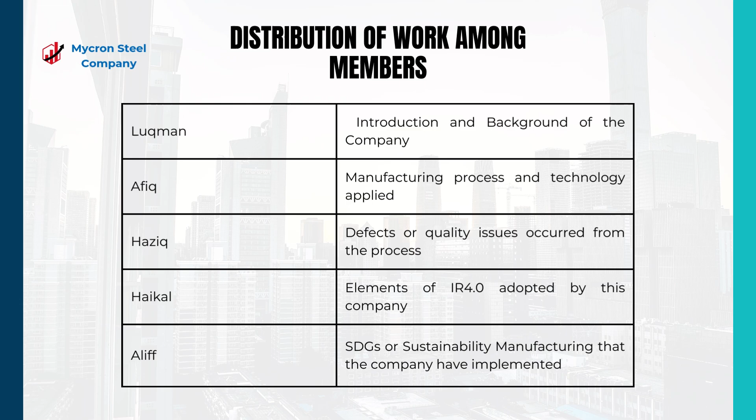Steel is an essential material used in many industries, including construction, automotive, and manufacturing. Companies like Mycron Steel play a crucial role in ensuring a steady supply of high-quality steel products to meet industrial demands. In this presentation, I will cover the company's history, its key subsidiaries, and its contribution to various industries.

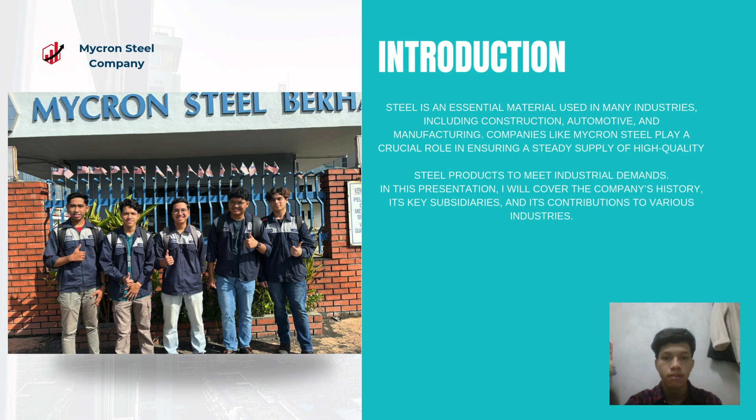Mycron Steel Berhad, often abbreviated as MSB, is a leading midstream steel processing company based in Malaysia. It was incorporated on 24 July 2003 and later listed on the main market of Bursa Malaysia under the stock code Mycron 5087. The company operates as an investment holding entity, providing corporate management services to its wholly owned subsidiaries involved in manufacturing, processing, and trading of steel products.

Mycron Steel specializes in producing cold rolled coils (CRC) and steel tubes, which are used in various sectors such as: first, automotive, for car body panels, exhaust pipes, and structural reinforcement; second, electronics and appliances used in refrigerators, washing machines, and air conditioners; third, construction for structural framework, roofing, and wall panels; and lastly, engineering and manufacturing, where they supply pipes, scaffoldings, and mechanical components.

As a steel manufacturer, Mycron Steel sources raw materials such as hot rolled coils (HRC) and converts them into high-precision steel products that are essential for downstream industries. The company strives for innovation, high-quality production, and sustainability to meet both local and international market demands. It also focuses on technologies and advancements to improve steel processing efficiency and ensure compliance with global industry standards.

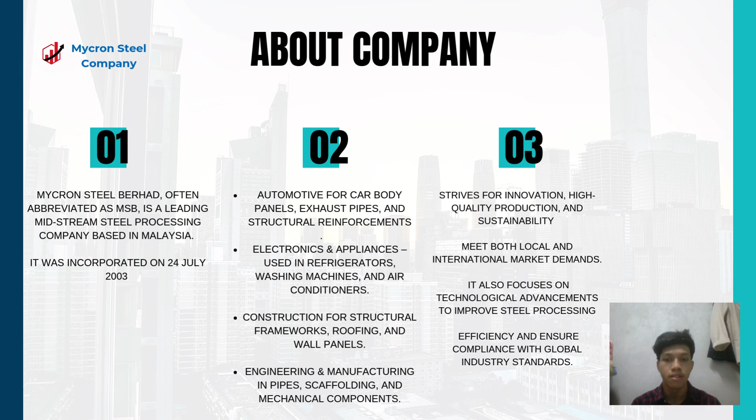Mycron Steel Berhad operates through three primary subsidiaries, each specializing in a different aspect of the steel industry. But today I will talk about Mycron Steel CRC Sendirian Berhad, or MSCRC.

The first subsidiary, Mycron Steel CRC Sendirian Berhad (MSCRC), was established on 6 January 1989 and started production in June 1990. It is notable for being the first manufacturer of cold rolled coils (CRC) in Malaysia and second, the only Bumiputera-owned steel company in the country.

MSCRC specializes in cold rolling technology, which involves reducing the thickness of hot rolled steel through a series of precision rolling processes to produce high strength and high quality steel sheets.

Key functions of MSCRC: first, the cold rolling process, where they convert hot rolled coils (HRC) into thin gauge cold rolled steel sheets with enhanced strength and surface finish. Second, the annealing and temper rolling, which improves ductility, hardness, and mechanical properties of the steel.

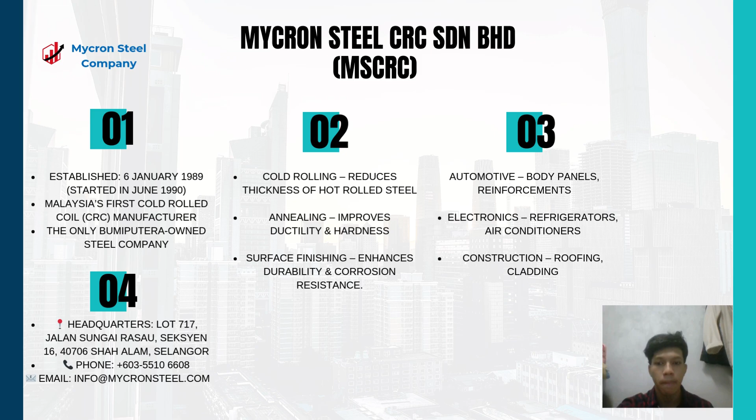Next, the processes used by Mycron Steel Company for processing the rolled steel: first, continuous pickling line; second, rolling and coating; third, cold roll mill; fourth, electrolytic cleaning line; and lastly, skin pass tension.

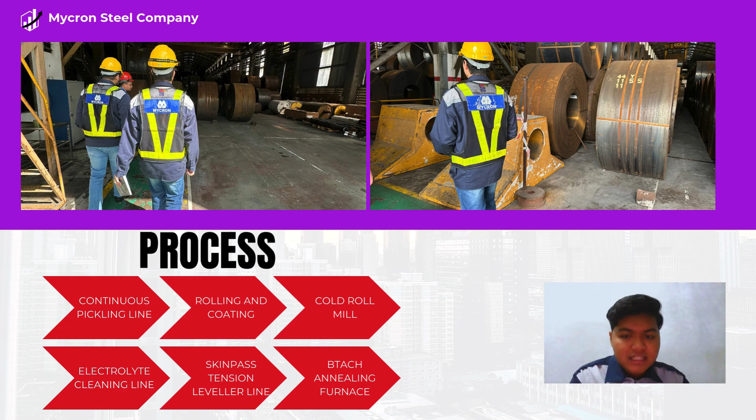The first process is the continuous pickling line. Steel coils or sheets which are imported are continuously fed into the line without stopping, reducing downtime. This helps to reduce delay with manual labor.

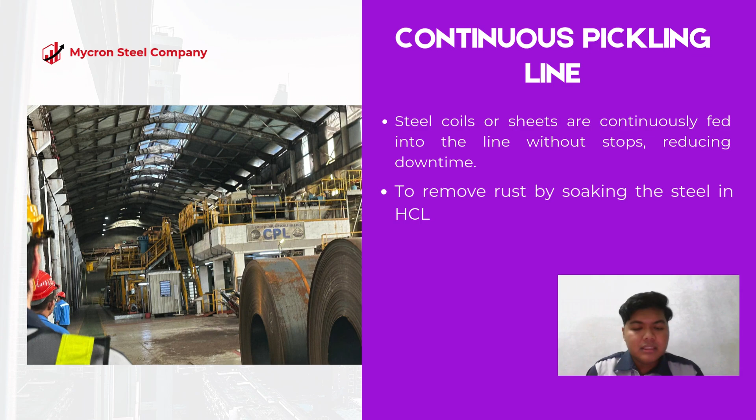Rolled steel usually comes with rust. There are ways to remove rust: one, by sandblasting, and another by soaking the steel in hydrochloric acid, which is what this company uses. There are a few tanks of acid - the first tank has the lowest acidity, and it will continuously increase. This process is a closed loop, which means the acid will be reused.

The second step, rolling and coating. Start with rinsing the steel to remove acid on the steel surface. Then the steel will be coated with a protective layer, usually oil, to prevent the steel from rusting.

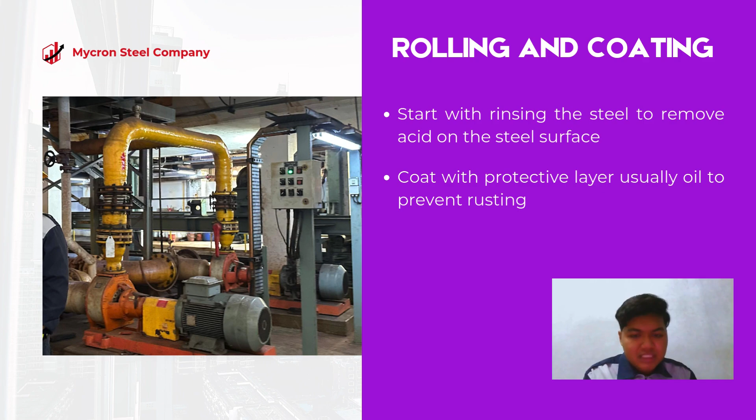The third process, the cold roll mill.

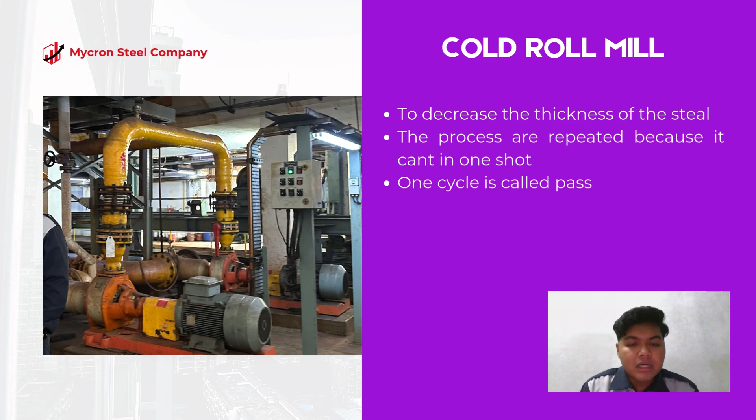The purpose of this process is to decrease the thickness of the steel to the desired dimension requested by the client. The process is repeated because it cannot be done in one shot. One repeated cycle is called a pass, and the pass always ends in an odd number. This process helps enhance the material strength.

The fourth process, electrolyte cleaning line. Contaminant removal in steel uses electrolyte solution and electric current. It breaks down impurities for effective steel cleaning, ensuring a clean, uniform surface for further processing.

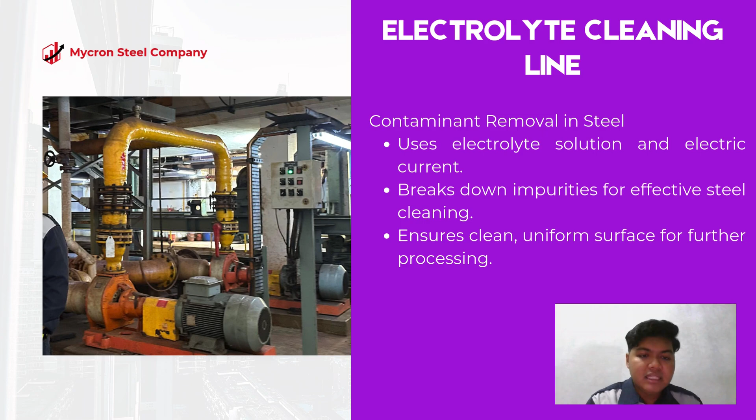The fifth process, skin pass tension leveler line. The steel manufacturing process uses skin passing. It improves the surface texture or roughness and mechanical properties. By increasing the surface roughness, or making it rougher, it helps the steel surface hold paint longer. Tension leveling helps eliminate shape defects and makes it more flat, producing flat, smooth and uniform steel.

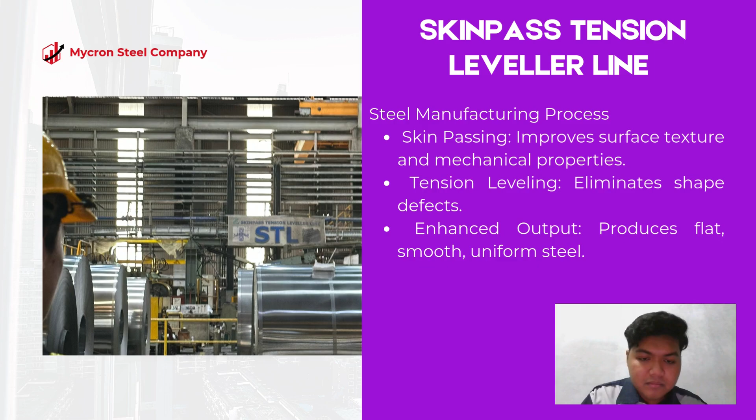The last process, batch annealing furnace, is used to soften cold-rolled steel coils, improving their ductility and eliminating internal stress caused during rolling. The material is put in the stove, and then nitrogen is added to remove the oxygen. When they want to start the burning process, they put in hydrogen gas to remove the nitrogen gas. Then they burn the material until it reaches the recrystallization temperature.

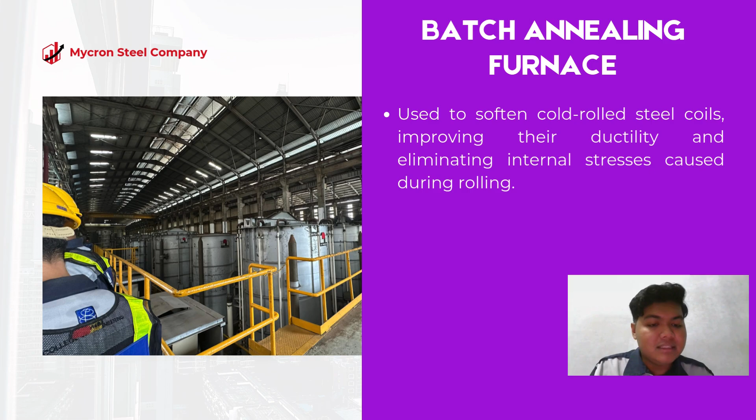Next, I will be discussing defects or quality issues that occur during various stages of the metal processing line. These defects can significantly impact the final product quality and must be carefully controlled.

Starting with the continuous pickling line, uneven acid cleaning can leave streaks or stains on the metal surface, affecting how it looks and works. Too much pickling removes too much material and causes scratches, making the metal weaker. Not enough pickling leaves behind unwanted residue that affects the next process. Also, if the edge gets too hot, it can create defects that make the metal less strong.

Moving on to rolling and coating. Uneven rolling can cause thickness variation, leading to inconsistent product dimensions. If debris or roller malfunctions occur, they can result in surface scratches, which affect both aesthetics and functionality. Poor surface preparation can lead to coating adhesion issues, causing peeling or flaking. Moreover, improper tension control during rolling may lead to wave or buckling, making the material unsuitable for further use.

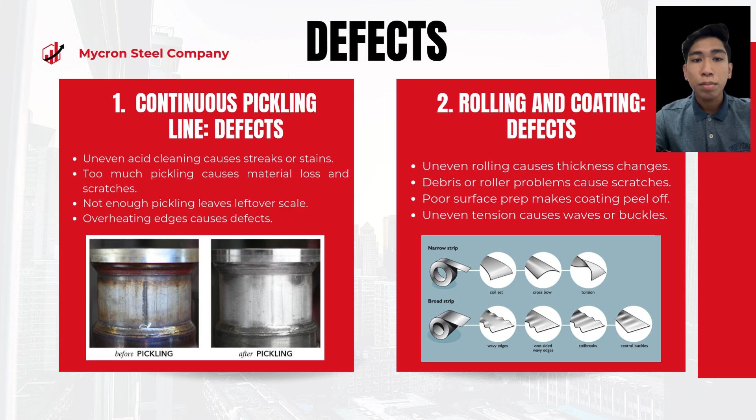In the cold rolling stage, excessive rolling stress can cause cracks along the edge, leading to product rejection. Uneven thickness distribution may create wrinkles in the center of the strip. Additionally, surface dents can occur if rolls are dirty or damaged, compromising product quality. In extreme cases, improper tension control can cause the metal strips to break, leading to material waste or production delays.

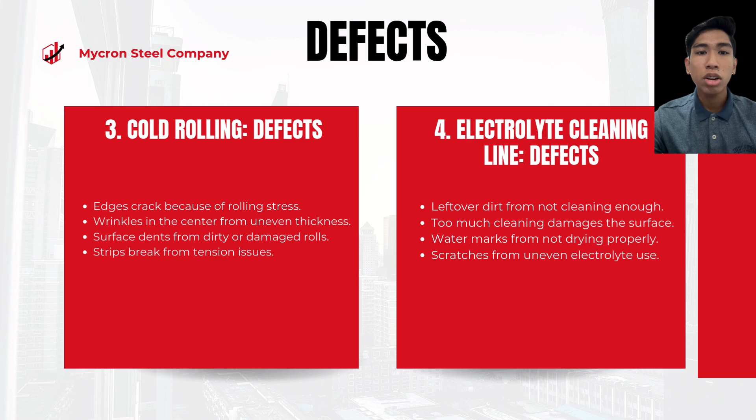Next, the electrolyte cleaning line plays a crucial role in ensuring the surface is properly cleaned before further processing. However, inadequate cleaning can leave behind dirt or contaminants, affecting subsequent treatment. Conversely, excessive cleaning may damage the surface, reducing the material strength. Improper drying can also lead to watermarks, creating an uneven finish, while poor electrolyte application can cause scratches on the surface.

Finally, in the skin pass tension leveler line, excessive tension can cause the metal strip to break, leading to material loss and production downtime. Overly high pressure during the process can make the surface rough, affecting its smoothness and appearance. Flatness issues such as waves or bending can occur due to improper tension control, making the material difficult to handle in later stages. Additionally, edges can become damaged if tension is not applied correctly, leading to further defects.

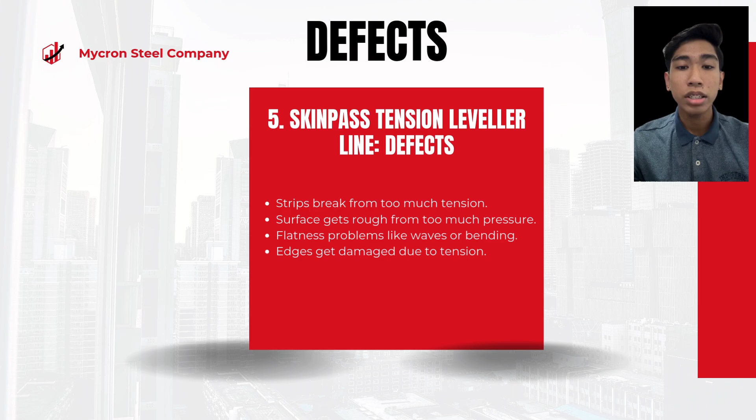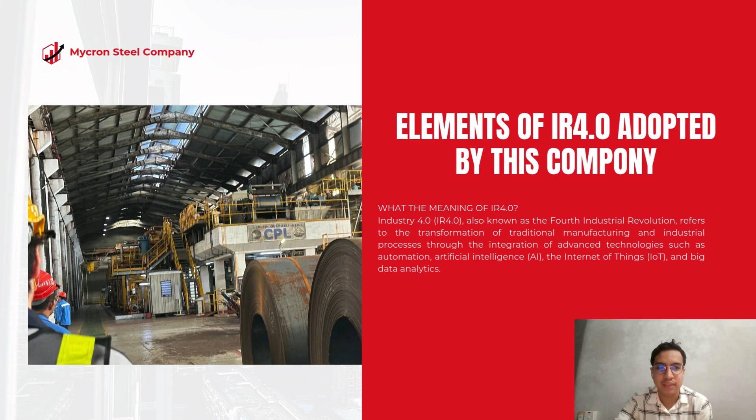So for the next slide, the element is IR 4.0 adopted by this company. Let me explain the meaning of IR 4.0. IR 4.0, also known as the Fourth Industrial Revolution, refers to the transformation of traditional manufacturing and industrial processes through the integration of advanced technologies such as automation, artificial intelligence (AI), the Internet of Things (IoT), and big data analytics.

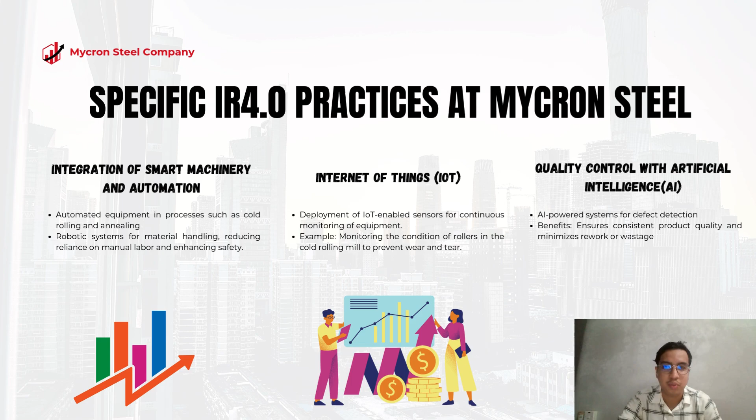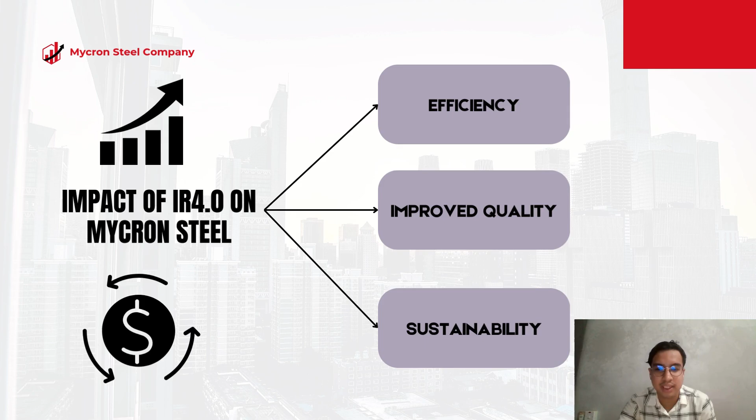The second point is improved quality: fewer defects due to real-time monitoring and AI systems, and enhanced product precision ensuring consistency in roll thickness and surface finish. My last point is sustainability: energy efficient processes reduce the company's carbon footprint, and better waste management through precise inventory and material usage tracking.

Hello, I'm Alif, and I will continue this presentation by giving a clarification on SDG, or Sustainability Manufacturing.

What is SDG? Sustainable Development Goals, or SDG, are a set of 17 objectives established by the United Nations to address global challenges. In the context of sustainable manufacturing, companies implement these goals by integrating eco friendly practices, for instance adopting renewable energy as a commitment to sustainability. By aligning manufacturing processes with SDG, companies not only contribute to a healthier planet, but also enhance their resilience, innovation, and long term profitability while fostering a positive impact on society.

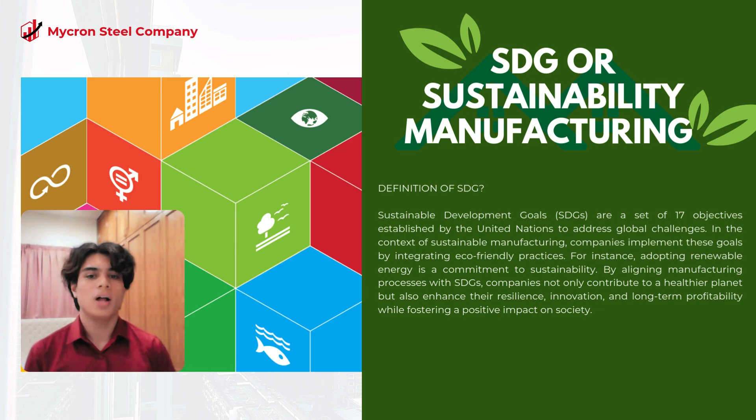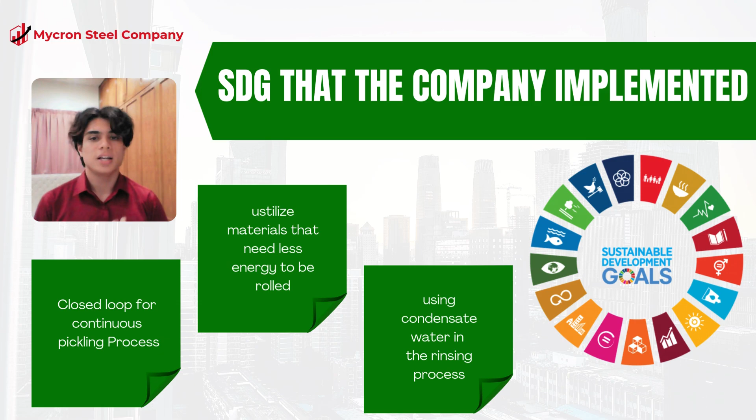Based on the company we visited, which is Mycron Steel Company, there are three things the company applies to follow the SDG: using closed loops for the continuous pickling process, utilizing materials that need less energy to be rolled, and using condensate water in the rinsing process.

For the first one, the SDG is applied during the pickling process. This is a process where steel strips are continuously pulled through acid tanks and rinsing tanks, to remove impurities such as stains, inorganic contaminants, and rust.

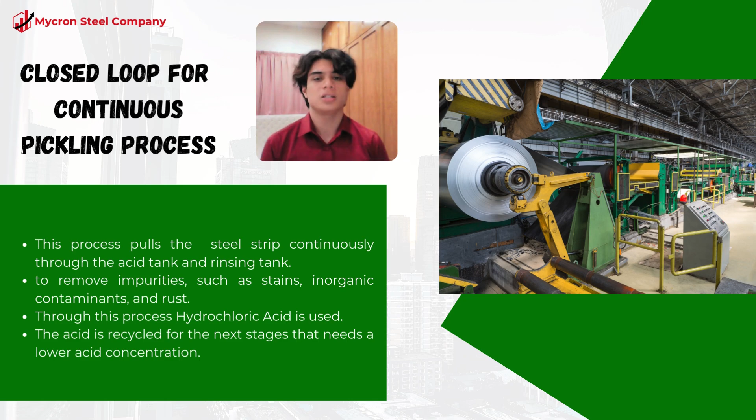The acid used is hydrochloric acid. This acid is recycled for the next stages that need a lower acid concentration. This aligns with the sustainability factor as the company is not wasting any resources on expensive assets.

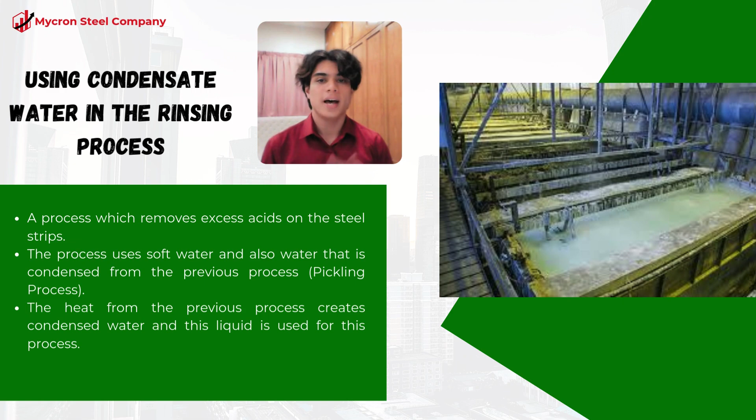Next, the SDG is applied during the rinsing process. This process removes excess acid on the steel strips from the previous pickling process. It uses soft water and also water that is condensed from the previous process, as the heat from the pickling process creates condensed water which is used here. Sustainability is achieved this way as the company does not have to use a lot of water, since they can collect it from the pickling process.

Lastly, the SDG is applied during the cold roll mill process. This process shapes the metal strips by passing them through a series of rotating rolls at room temperature. The steel strip is rolled multiple times until the desired thickness is achieved, enhancing its strength and hardness while maintaining dimensional accuracy.

This machine uses engines as a source of power because it requires a lot of force to roll the steel. Using materials that need less energy to be rolled will lessen the consumption of fuel, and at the same time reduce the carbon emission from the machine, thus following the goals set by the SDG.